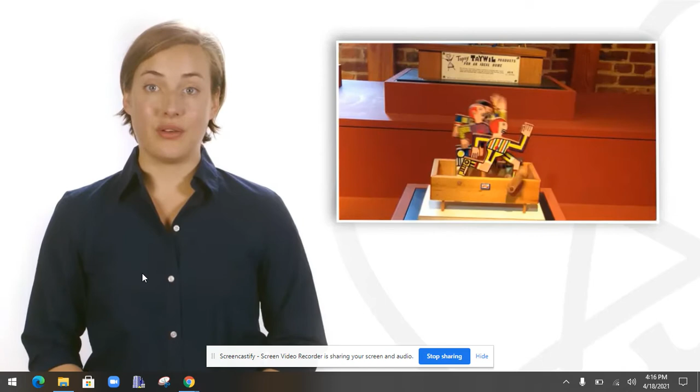This video shows examples of automata that were displayed at the American Visionary Art Museum in Baltimore, Maryland. The automata are part of an exhibit from Cabaret Mechanical Theatre in London, a collection of whimsical, interactive automata. These examples include contributions by 3 automata artists, Paul Spooner, Peter Markey, and Keith Newstead. The works are listed only as mixed media.

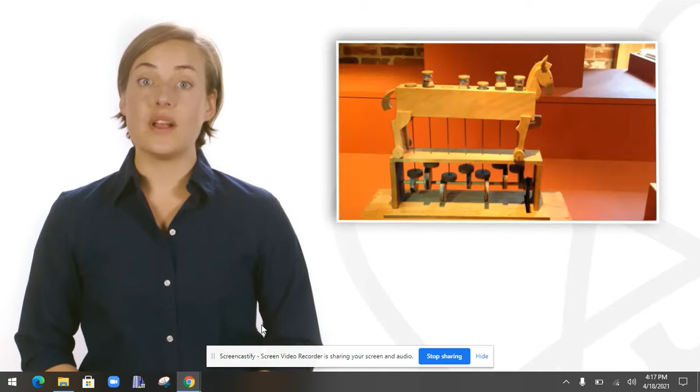Most of the automata are constructed of wood, metal, or both. These automata were designed to be hand-operated. But for the museum exhibit, each machine was also automated so an observer could push a button switch that runs a motor under the display surface that powers the automata.

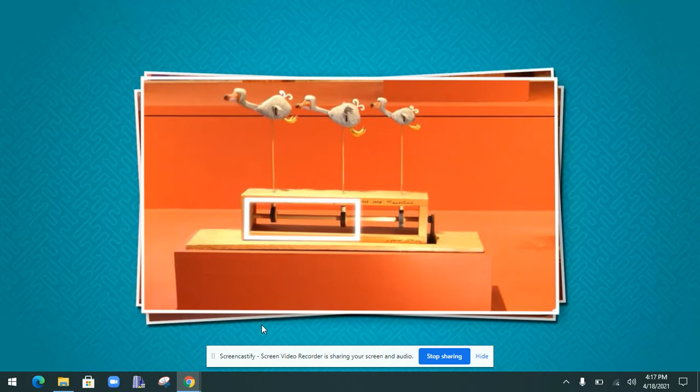The 2 cams that control the larger dodos are called pear cams. Notice that the cams have different orientations, 180 degrees from each other, which results in the dodos moving to different positions at different times. The smaller bird moves much more rapidly and is controlled by a different cam. This cam causes sharp movements, whereas a pear cam produces smooth motion.

Now, pause the video and answer the following questions. Can you sketch the profile for this cam? How many times does the small bird move up and down during one revolution of the axle? How does the number relate to the cam profile?

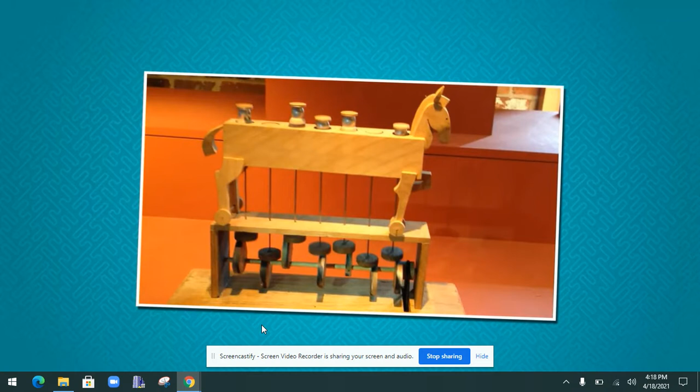The next example is the Trojan horse, designed and built by the same artist, Paul Spooner, in 1986. This device is belt-driven. An unseen motor drives a rubber belt below the surface, which rotates the axle. Take a close look at this automaton before it's put into motion. How many cams are used to create the motion?

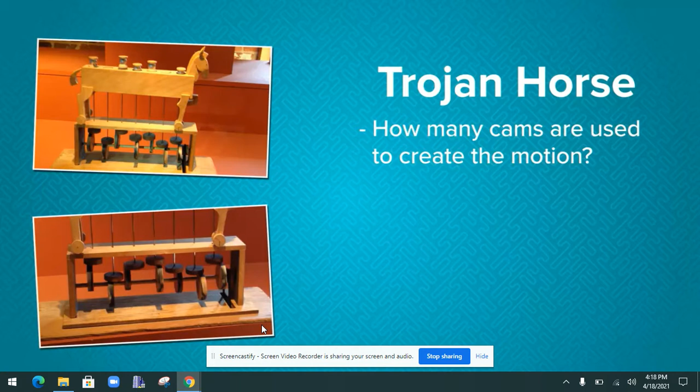Notice the orientation of the cams at varying rotational angles, each in a position to cause maximum displacement at a different time. Can you describe the soldier's vertical motion once the automaton is actuated? Pause the video to discuss these questions.

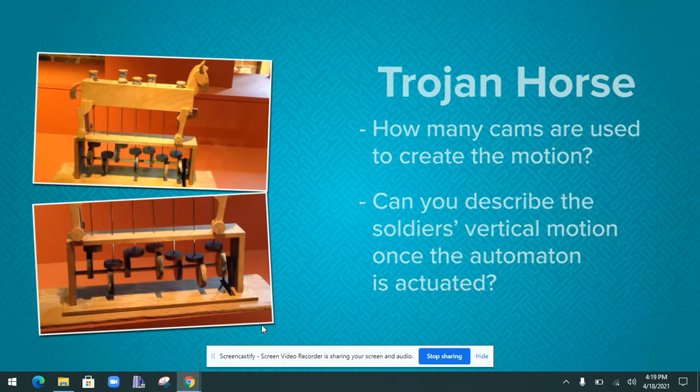Notice, too, that the followers are not vertically centered over the cams. Each follower rod is connected rigidly to a soldier, but the follower rod does not align vertically with its partner cam. Instead, it's offset. Think about what motion this misalignment will cause in the follower and soldier as the cams rotate.

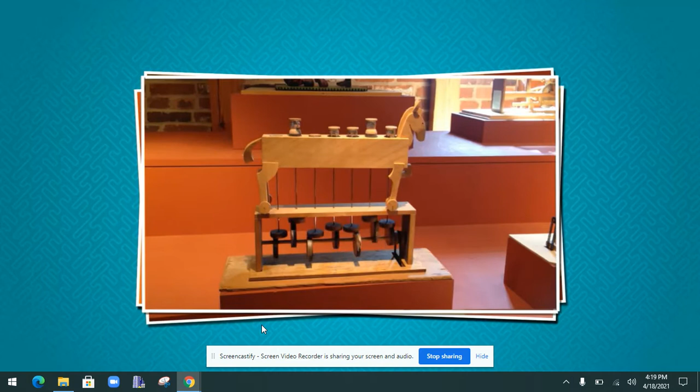Did you correctly predict the soldier's motion? Each soldier moves up and down because of the pear shape of the cam, but each follower, and therefore the attached soldier, also spins about its center axis because the cam makes the offset follower spin.

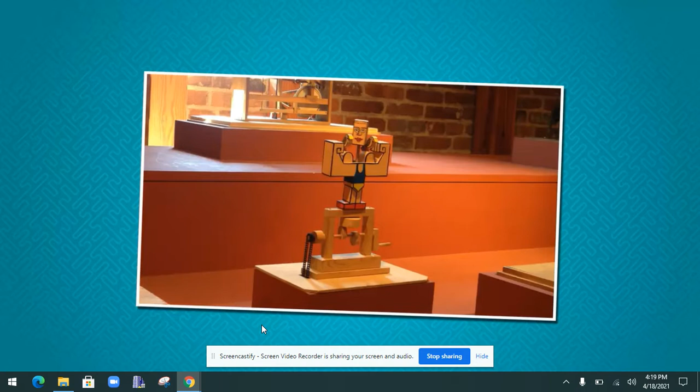The next automaton we'll look at is the Muscle Man, which was constructed by Peter Markey in 1992. Before we show this automaton in motion, take a close look at the mechanism and predict the motion that will result when the axle is turned. Notice that there are 2 identical elliptical cams, but only 1 follower.

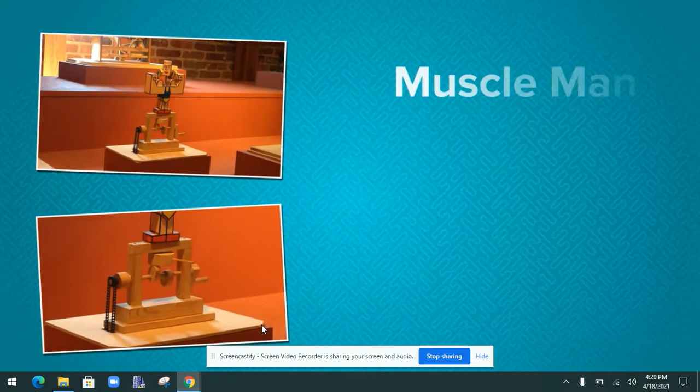Pause the video and answer the following questions. What will the resulting motion look like? And what function does the dowel that protrudes from the front of the follower disc perform?

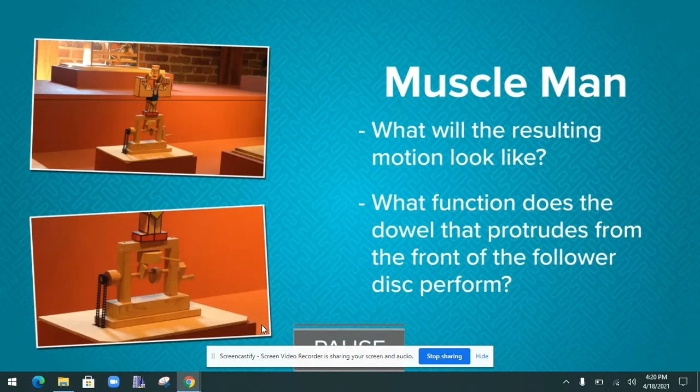As you watch the motion of the automaton, think about which parts of the figure are attached to the follower. Is the head attached to the follower in the same way that the muscles and birds are attached? We refer to this connection between the head and the follower rod as a rigid connection. In other words, the head and the follower move as though they're a solid piece.

Together, the head and the follower move up and down, and they twist. We refer to the linear up and down motion as translation, and the twisting motion as rotation. We can say that as a rigid piece, the head and follower have 2 degrees of freedom. That is, they translate vertically, and they rotate about the vertical axis.

In contrast, the arm muscles and birds only translate with the follower. They don't rotate. Rather, the muscles have only 1 degree of freedom, vertical translation. Continue to think about the variety of ways automation is part of mechanisms and systems in the world today. Then use these examples as inspiration as you design, build, and test a mechanical system to automate the motion of objects.

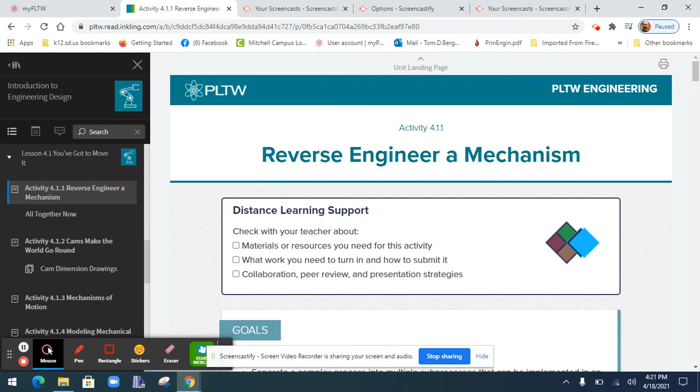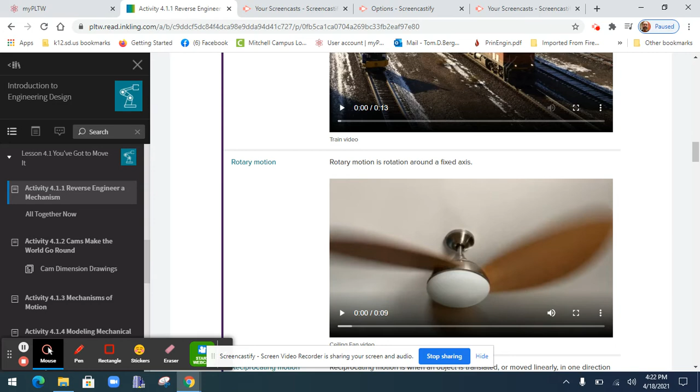So we're going to continue now and take a look at, we've talked about automation, types of motion. So the first type of motion is called linear motion, when an object moves in a straight line, very similar to what this train can do on the track here, moves in a straight line. Second one is rotary motion, rotation around a fixed axis, like a ceiling fan.

The third one is called reciprocating motion, when the object is translated or moved linearly, like up and down, in one direction and then back along that same path, kind of like this sewing machine here. So I'm going to play the sewing machine so you can see what it's doing there. That's called a reciprocating motion. A scroll saw, jigsaw also uses that reciprocating motion there to move it up and down.

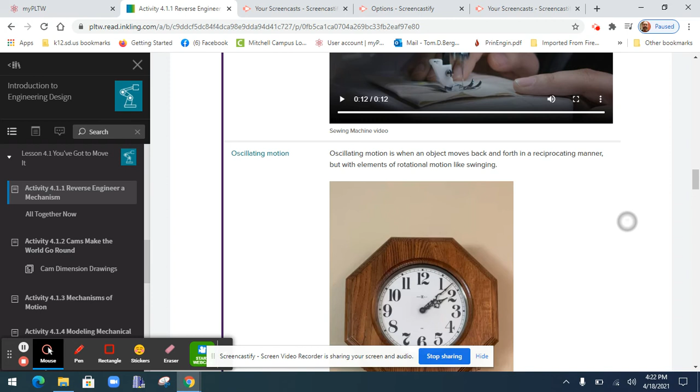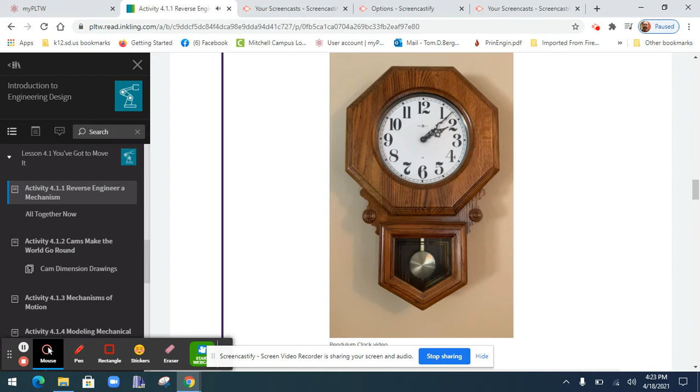And the fourth one is called oscillating motion. This one moves back and forth, but this one is more like, you've got something hanging there. So you've got like a clock there. We'll watch the video here. And it just kind of goes back and forth, back and forth. Okay? And that one's called oscillating. It oscillates. Just like sound waves oscillate.

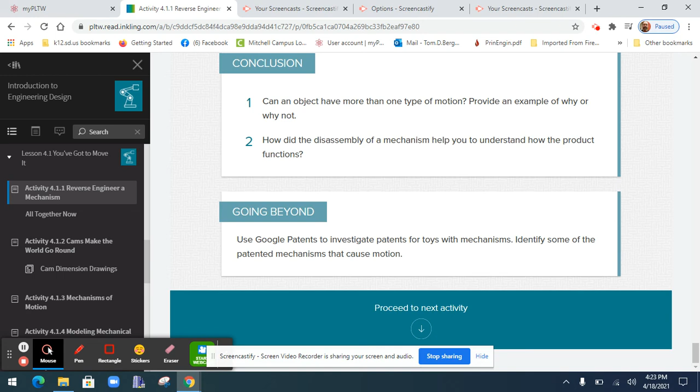Okay? So that's it about the motion. I'm going to scroll through the rest of this. And then we're going to go on to the next one so we can get some notes about cams. So we'll watch the video on the cam mechanism here.

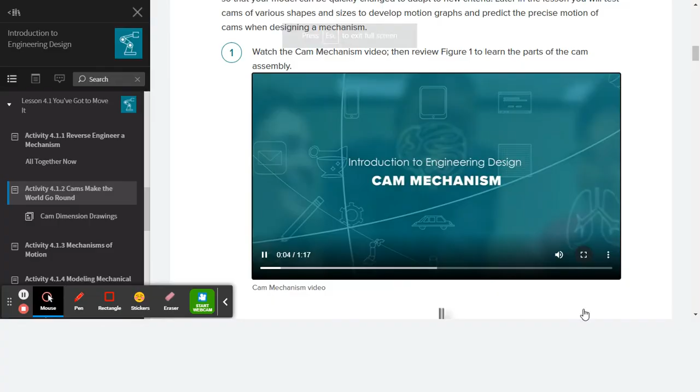Cams are used to create motion in various machines and devices. Complex cam systems can be found in car engines and oil pumps, while simpler versions can be found in children's toys. A cam is a mechanism that moves to change the direction or rhythm of movement of other parts. Usually cams are rotated by an axle or shaft and cause linear movement of another part or parts.

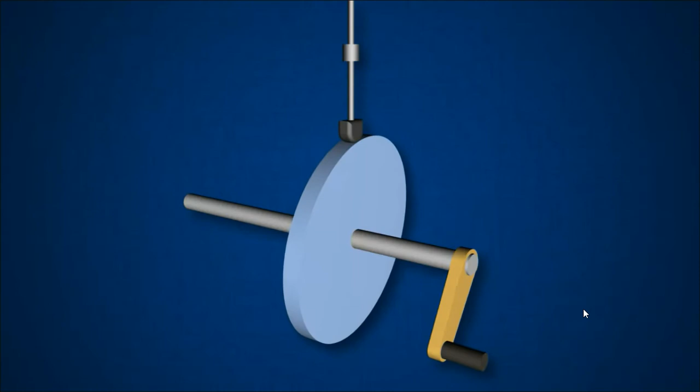A cam mechanism is made up of just a few parts: a crank, axle, cam, follower, and a guide. The crank turns the axle or shaft, which then rotates the cam. The follower rests on the cam's surface and moves through a guide as the rotating cam surface displaces it. The follower is converting the cam's rotational movement into linear movement.

The cam's shape is referred to as its profile, and there are many different types of profiles. This is an example of an elliptical cam, but there are also circular, pear, eccentric, hexagonal, snail, and heart profiles.

Okay, that's all we have for notes here. I'll go ahead and